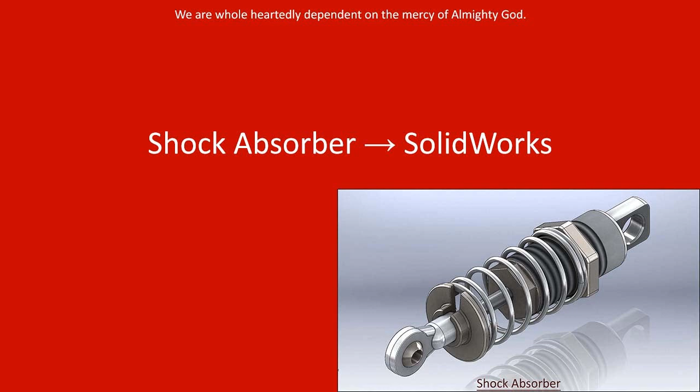Today we will create an assembly file of a shock absorber in SolidWorks, taken from our suspension assembly. You will learn the full modeling process of this model and its components. We used 13 part files and 4 subassemblies to make this assembly. Some pictures are shown at the beginning of this video. Let's start the tutorial.

Now we will create a new inch part file in SolidWorks. Click OK. Now we will activate the extruded boss base command and select the front plane to start the new sketch.

We will draw a circle from the part origin with a diameter of 0.525 inches. Finish the sketch. Now set the extrude depth value to 0.075 inches and click OK. My first boss base extrude feature has been created in the design window.

Now we will change the color of the model like this. My model is looking perfect. Save the part file with the name shock spring adjustment nut.

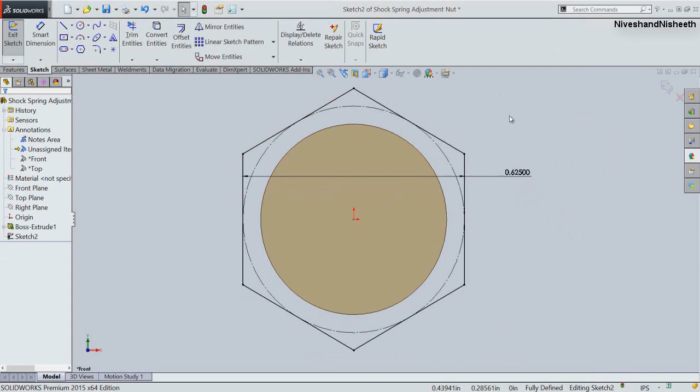Select this vertical line and choose to make it vertical. Now activate the Smart Dimension tool and fix the dimension of 0.625 inches between these two vertical lines. Finish the sketch.

Now activate the extruded boss base command and select the polygon. Enter the depth value 0.125 inches and click OK.

Now rotate the model to the back side and activate the Extruded Cut command. Draw a circle over this face with a diameter of 0.5 inches. Finish the sketch and cut the circle through all over the body. Now see the result.

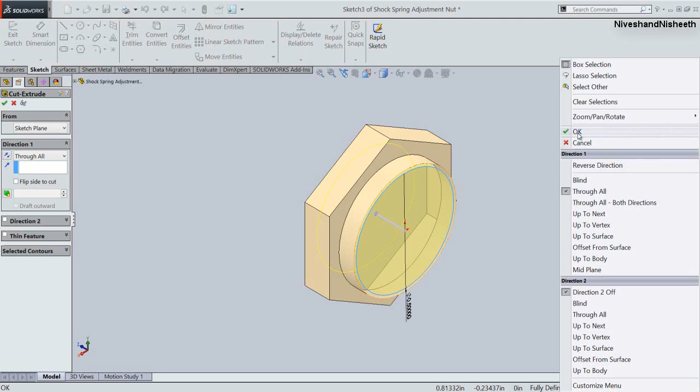We will activate the fillet command, enter the radius 0.005 inches, and apply the fillets over all the polygonal edges of the part.

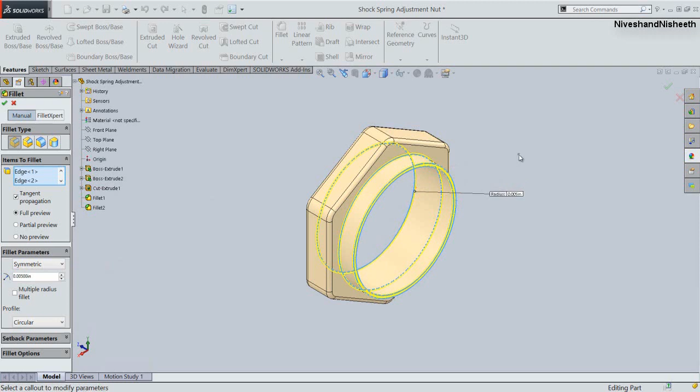Now we will give some more fillets over the part like this. Now my part is completed.

Next, we create a model spring. Now we will create a new part file. Click OK.

Now we will go to the Edit Document Units tab, activate the IPS option, and set the decimal value up to 4 places. Click OK.

Now we will change the scene of my background. Select the backdrop studio room option. It looks great.

Now we will select the front plane to start the new sketch. Create a vertical line here and fix the coincident relation between the midpoint of this line and the part origin. Its length will be 5 inches.

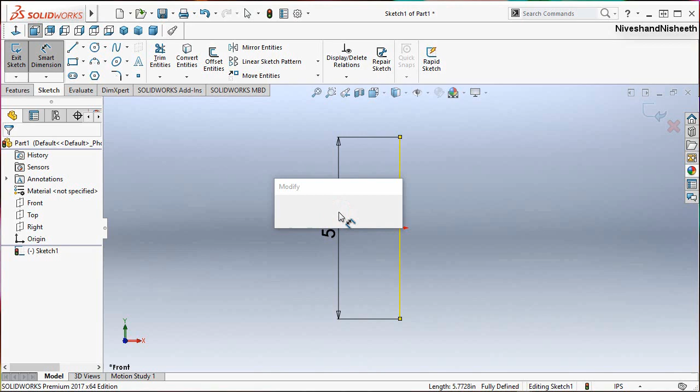Now we will create 2 circles with a diameter of 0.043 inches. Apply the equal relation on these 2 circles, select the center points of the circles, and make vertical.

Create a point on this circle, and one more point here. Apply the tangent relation on these 2 circles. Now select this point and the end point of the line, and fix the horizontal relation between them.

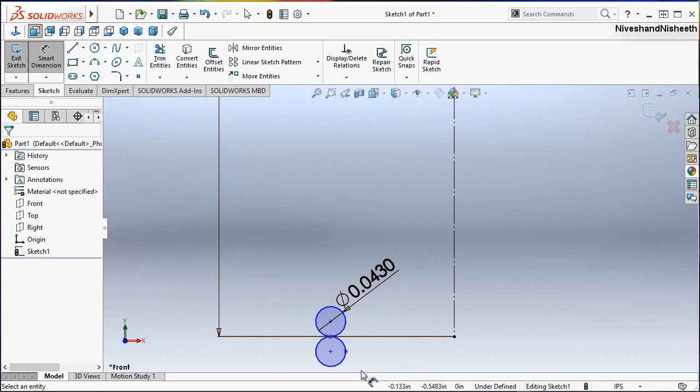Convert the center line into construction geometry. Now select this point and the center construction line and fix the diameter dimension, which will be 0.55 inches.

Now we will choose the zoom to fit option. My sketch is fully defined in the design window, so we will exit the sketching environment. Now choose an isometric view.

We will activate the plane command. First select the center point of the top circle, then select the top plane and click OK. Now see, a plane has been created over the center point of the circle, made parallel from the top plane.

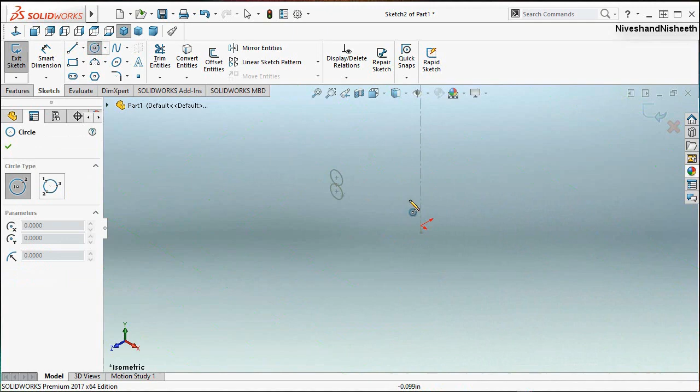We will create a new sketch on this plane for making the helix cross section. Create a circle from the part origin and snap it on the center point of the top circle. Finish the sketch, and hide the visibility of this work plane.

We will go back to the base sketch and convert the lower circle into construction geometry, because the Helix Spiral tool will not select the sketch properly. Finish the sketch.

Now we will activate the Helix Spiral tool. First we will select this circle for the helix cross section. Now see the helical curve preview is visible here in the design window.

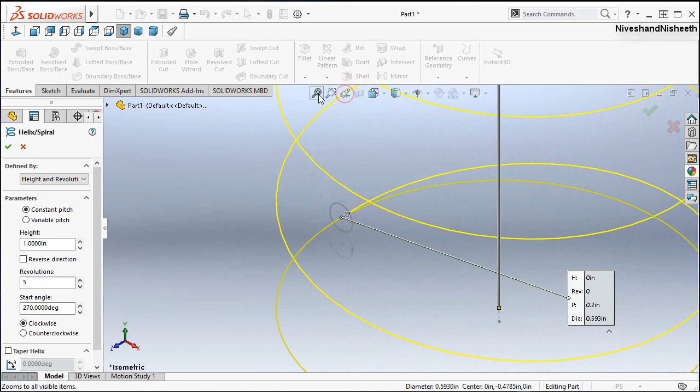Set the height and revolution option under the define by area. Fix the height value to 1 inch and set the revolution value to 5. Then fix the start angle value to 270 degrees. Now see the helix direction is visible here. Click OK.

Save the part file with the name suspension spring.

Click save, okay, that's it. Now we will activate the swept boss base command.

First of all, we will select the small circle from here, which will keep as a profile. Then select the helix curve from here, which will keep as a path. Now you can see in the design window, my swept boss base feature preview is visible here.

Click OK to finish the command. Now see the result. My suspension spring has been created successfully on here. Alright, it looks great.

Now we will activate the document properties button on here. Go to the image quality section and here we will increase the shaded and draft quality of the spring model so that the edges of my model look very good. Click OK.

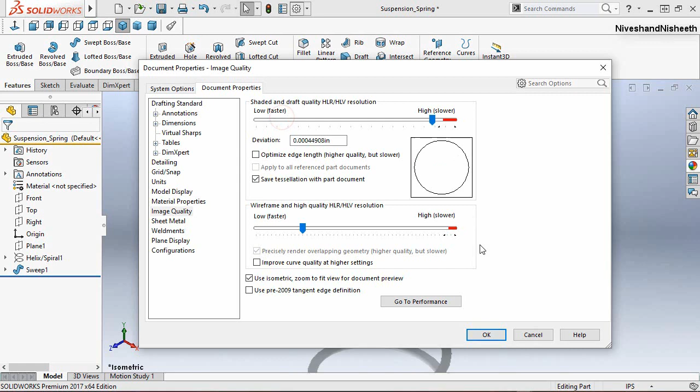Now see the result. Now we will change the material of the model as chromium plate. Okay, my model is looking perfect.

Let's start the sketch over this plane. Open the visibility of sketch 1. In the same manner, we will create one more helix cross section on here that we had done previously.

Alright, activate the Helix Spiral tool from here and select the circle. Now activate the reverse direction button on here.

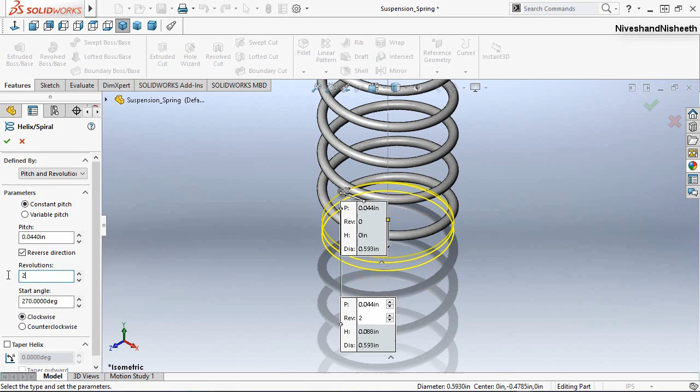Select the pitch and revolution option. Fix the pitch value 0.043 plus 0.001 inch and set the revolution value. Choose the counterclockwise option and click OK.

Now see. In the same manner, we will create another sweep boss base feature like this. Okay, it is looking very fine.

Start the sketch over the front plane. Take the project of the entire model by activating the intersection curve command. Enable the section view on here.

Now we will rotate the model in this position. Convert all the sketches into construction geometry.

Now we draw a rectangle on here. And fix the tangent relation between this rectangle line and this curve. Alright, finish the sketch.

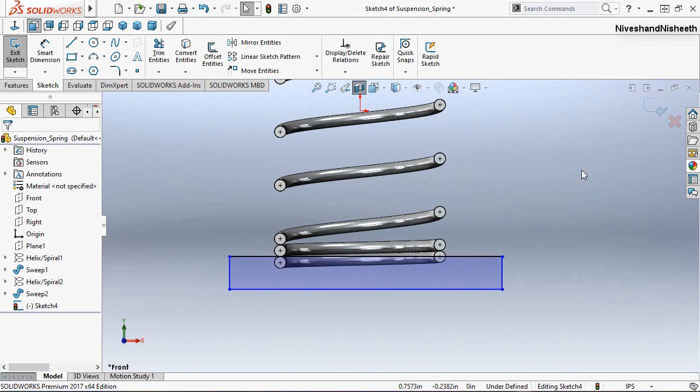Choose an isometric view. Select the line of the rectangle and start the Extruded Cut command. Now we will choose the through all both option and click OK.

Now see, my bottom surface of the spring model is plain on here, so that we will place the spring easily on my suspension assembly. Okay, that's it.

Open the visibility of sketch 4. Create a new plane over the top end of the spring like this, which will be made parallel to the top plane.

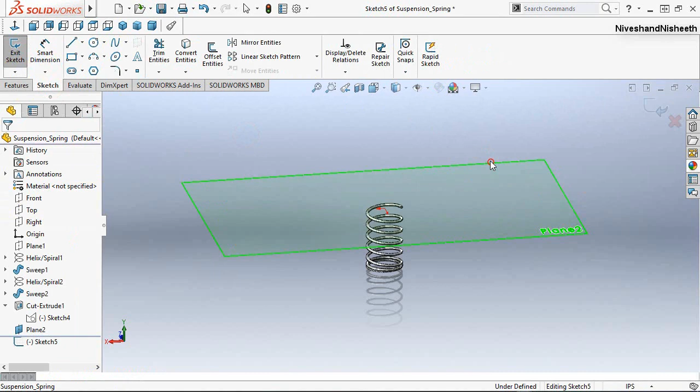Start the sketch over this plane. Now we will create another circle over this plane for creating a helix cross section. Alright, finish the sketch.

Activate the helix tool and select this circle. Same values will keep on here. Deactivate the reverse direction option and choose the clockwise option and click OK.

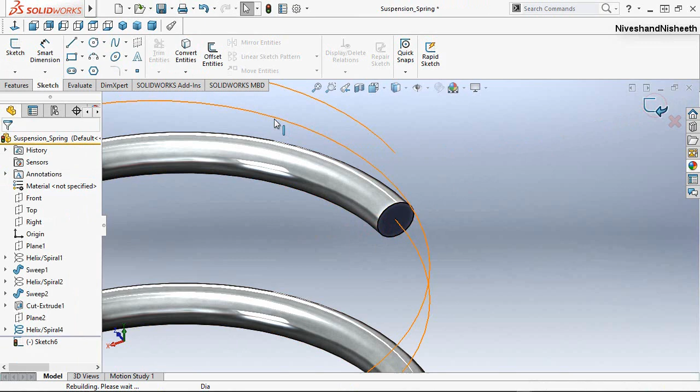Create a new sketch over the top face of the spring and take the project on this edge. Okay, that's it. Finish the sketch. Now we will create another swept boss base feature like this.

Now we will open the visibility of sketch 4. Activate the plane command. Now select this point, and select this point, and select the third point. Okay, alright, now see the result.

My 3-point work plane has been created on here. Let's start the sketch over this plane. In the same manner, we will plane the top face of the spring by using the Extruded Cut command that we had done over the bottom face.

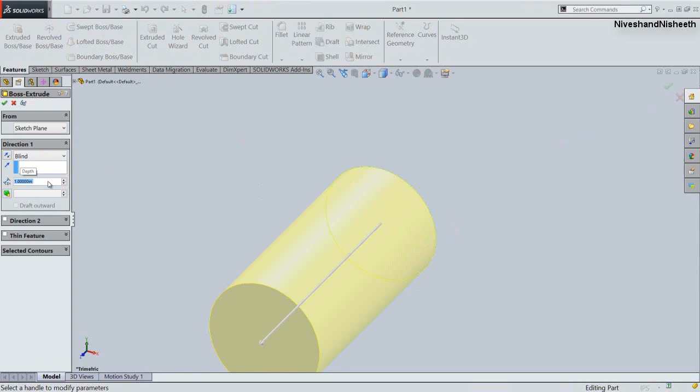Now we will save the part with the name shock body 1.3 length.

Now we will activate the shell tool from here and select the front face. Set the thickness value 0.035 inches and click OK.

Now we will apply the fillet on this edge. The fillet radius will keep 0.05 inches.

Let's activate the Extruded boss base command and start the sketch over the front face. Now create a circle on this face and fix the diameter 0.375 inches. Finish the sketch. Enter the depth value 0.4 inches and click OK.

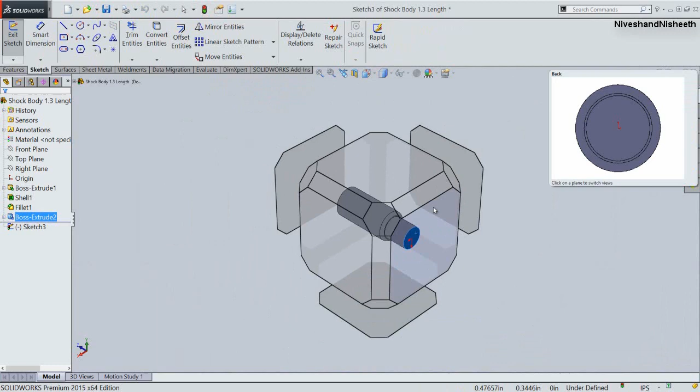Now we will create another new sketch on the front face. Draw a vertical construction line on the center part origin and take the project of this inner edge by activating the Convert Entities command.

Now we draw two vertical lines on both sides of the center line. And select these three lines on here. Choose Make Symmetric. Okay.

Apply the dimension 0.15 inches between these two vertical lines. Fix the coincident relation between this endpoint of the line and the inner circle. In the same manner, we will fix another coincident relation over the opposite line.

Now convert this circle into construction geometry, otherwise the extrude cut feature does not pick up the sketch at a time. Now create a center point arc on both sides like this.

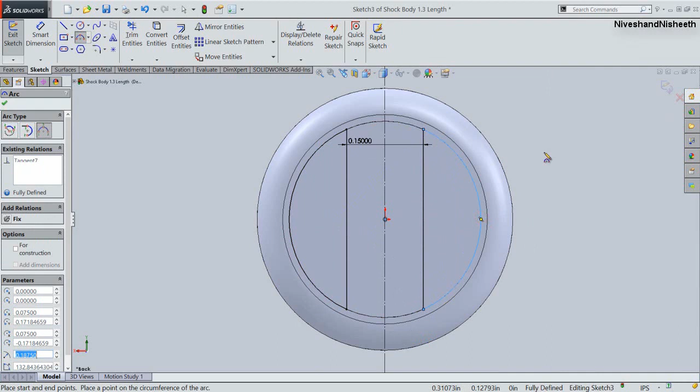Now exit. I will choose the cut extrude, okay, select the sketch. Now I will create one more cut extrude feature on the opposite side.

I will select the extrude cut command and select the side face. Now draw a circle, its diameter 0.24 inches, and distance from the outer edge 0.1875 inches.

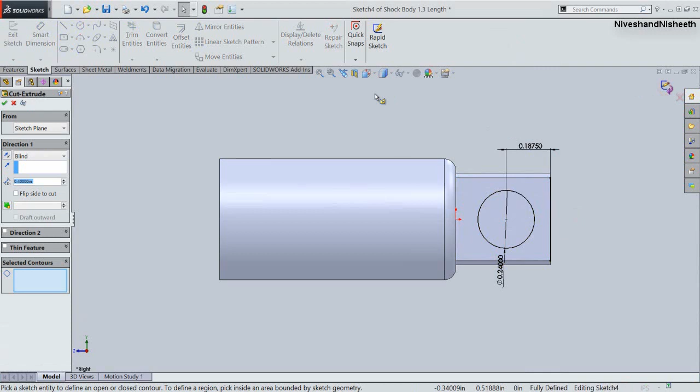Now select these 2 points and choose make horizontal relation. See, my sketch is fully defined, so we will exit the sketch. Now select the circle and condition keep through all both.

Now I will apply some chamfer and fillet over the hole.

Now I will start the cosmetic thread tool from here. First I will choose this circular edge.

Now I will select the 1/2-20 size here. Thread depth keep 0.75 inches. Now I will select the front face of this model so that my cosmetic thread has started from here. Okay, now see.

Now we will apply another cosmetic thread over the hole like this. This time thread depth keep 0.375 inches.

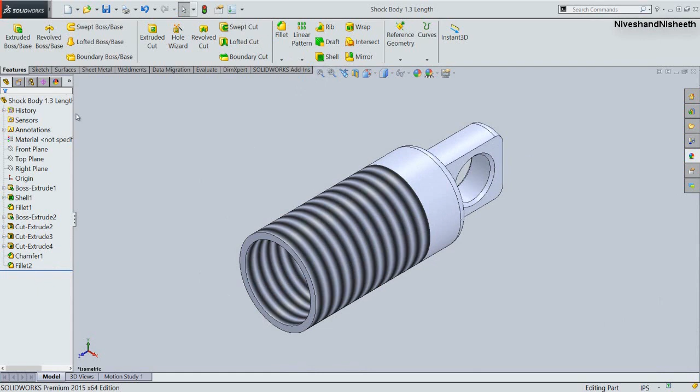Now I will change the color of the model blue. It is looking perfect. Now save the file and close it.

Now we will create another new inch part file from here.

First of all, we will activate the extruded boss base command. Choose front plane to start the new sketch. Now we draw a circle from this origin point. Its diameter will keep 0.5 inches.

Okay, finish the sketch. Enter the depth value 0.125 inches. Click OK. Now see, now choose isometric view.

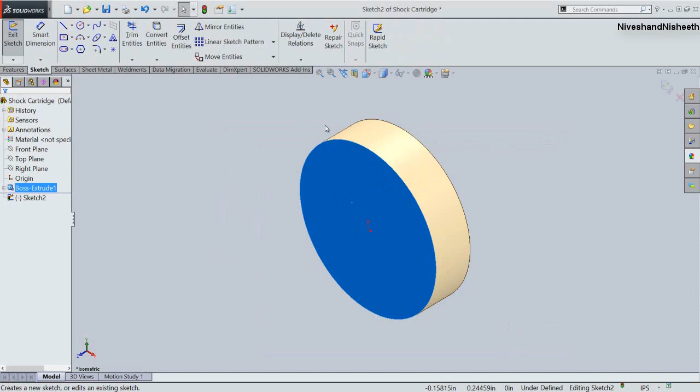Select this face, sketch. Now choose front view from here.

And create a polygon from the center point, and snap the polygon point over the outer edge of this feature. Now choose make coincident over this point. Finish the sketch.

Activate the Extruded Cut command and select the polygon from here. Now select the flip side to cut option and enter the depth value 0.11 inches.

Now I will activate the fillet command, constant size fillet, symmetric, and 0.005 inches the radius.

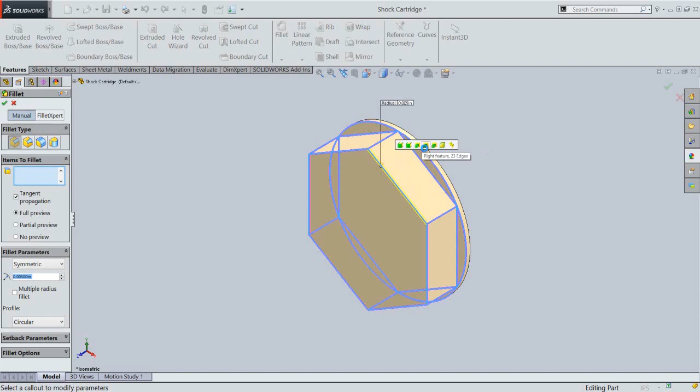Now one by one I will choose all, but I will choose the right feature option here, so it will automatically select all the edges of the part. There is no need to select one by one. Okay, alright.

Now my part is looking perfect. Now rotate the model in rear side.

And activate the Extruded Boss Base command. Select this face to start the new sketch. Now we will create a circle from here and its diameter will keep 0.43 inches.

Finish the sketch. Enter the depth value 0.25 inches. Okay, alright.

Now we will start the new sketch over this face. Create a circle from here. Its diameter will keep 0.25 inches.

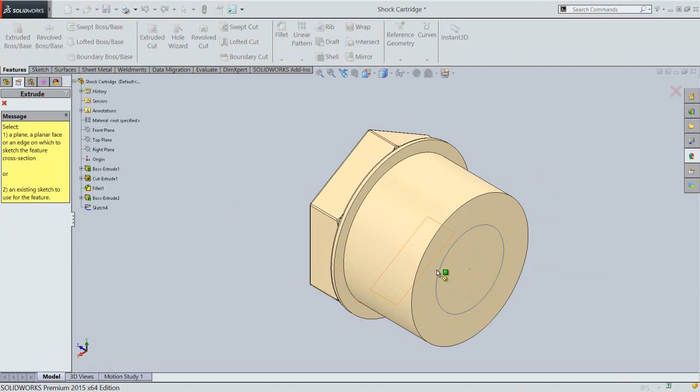Finish the sketch. Now activate the Extruded Cut command and select the circle. Enter the depth value 0.29 inches. Okay, alright. Now my hole is created over this face.

Now we will activate the Extruded Cut command. Select this front face. Draw a circle on here. Its diameter will keep 0.135 inches. Okay, that's it.

End condition keep through all. Okay.

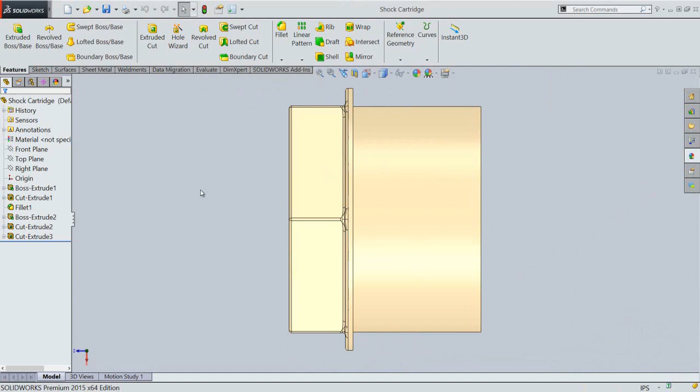Now I will choose the top view. Select top plane, sketch, activate the section view by selecting this plane. Okay, that's it.

Now we will take the project of the entire model by activating the intersection curve command and convert all the sketches into construction geometry.

Now we will draw a vertical construction line over the part origin. Now we will draw some more lines over this edge.

Select this line and this line, fix the dimension 0.025 inches. .05 inches. .025 inches. Okay, that's it.

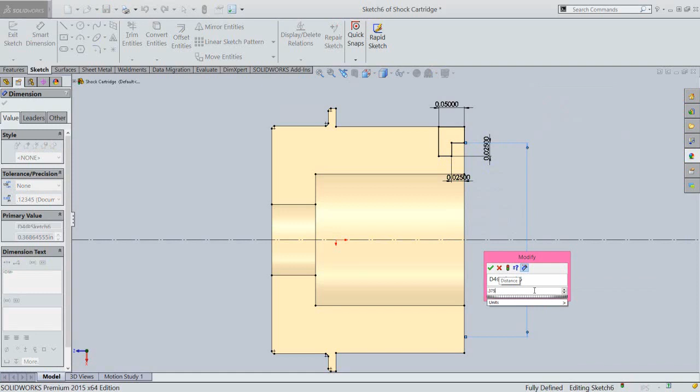Select this line and center construction line, its dimension 0.375 inches. Okay, that's it.

Finish the sketch. Now go to the isometric view and deactivate the section view.

Now we will activate the Revolve cut command from here. Choose the center line. Okay, that's it. Now my feature is cut on here.

Now we will apply the fillets on these two circular edges. Okay, it looks great.

Activate the cosmetic thread command and select the ANSI option under the standard section. Now select the back circular edge to apply the thread.

Alright, my part has been completed on here, so we will close the part file. Now create another new part file on here. Let's start the sketch over the front plane.

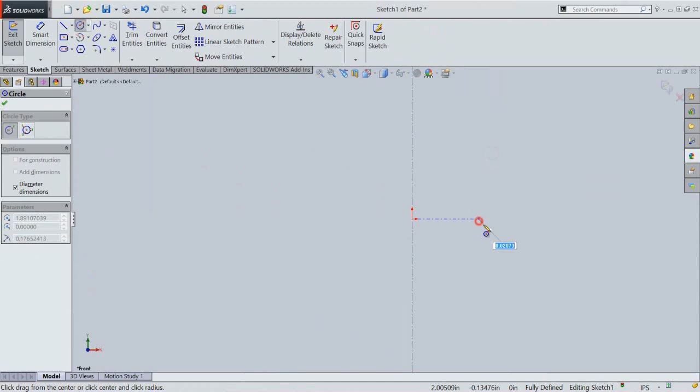Now we will draw a vertical construction line on the center part origin. Draw a circle on here. Its diameter will keep 0.0625 inches. The center distance of the circle will keep 0.094 inches.

Fix the horizontal relation between the center part origin and circle center point. Okay, finish the sketch.

Now we will activate the Revolve boss base command and select the vertical construction line for the axis of revolution. Click OK. Now see.

Now we will change the material of the part as polished bronze. Go to the lights folder and increase the ambient light from here. Now my model is looking very nice.

Save the file with the name O-ring. Okay, that's it. Close the part file.

Now we will create a new inch part file and choose the front plane to sketch. Now we draw a vertical and horizontal construction line over the part origin.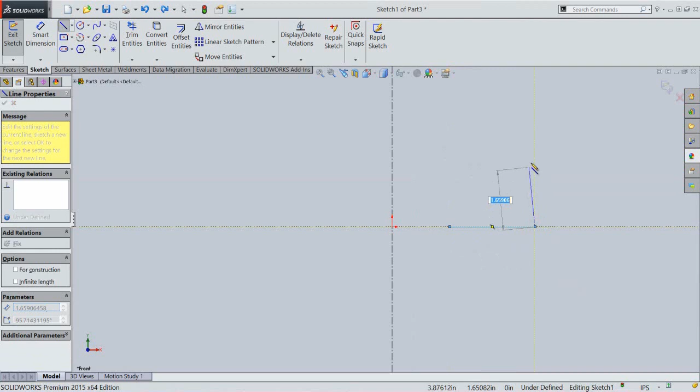Now we will create two lines here. Select this endpoint of the line and the center construction line. Fix the diameter dimension at 0.13 inches.

Now we will create another diameter dimension here. It will keep 0.41 inches. Fix this vertical line dimension at 0.07 inches. Okay, alright.

Now we will create another line from this point. This dimension will keep 0.025 inches.

Now we will draw some more lines, something like this. Select this line and the center line and fix the diameter dimension at 0.375 inches.

Now select this endpoint of the line and center line and fix the dimension at 0.356 inches. Okay, that's it. Now we will apply some more dimensions here like this to fully constrain the sketch.

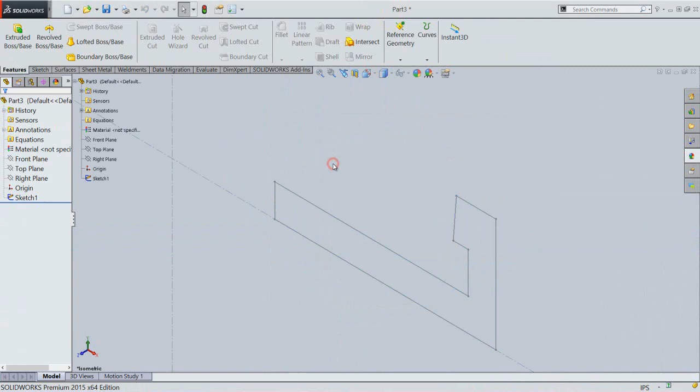Okay, now see, finish the sketch. Choose isometric view. Now we will activate the Revolve boss base command from here. Select this vertical construction line. Now see, click OK.

Now we will change the material of the model as polished steel. Okay, that's it, my part is looking perfect. Save the file with the name shock cartridge cover.

Okay, alright. Now we will apply the fillet over this circular edge. Now we will apply another fillet on these edges of the part, like this.

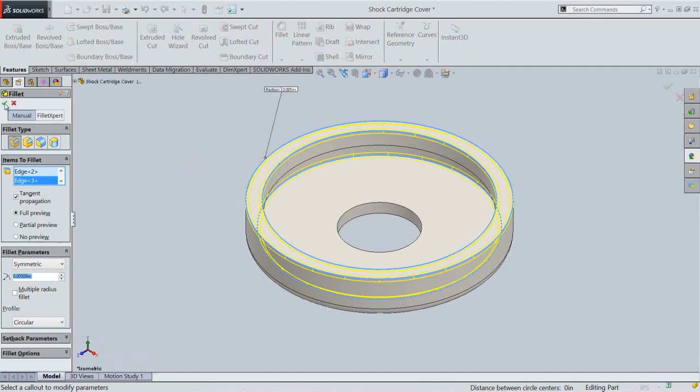Okay, close the part file. Now we will create another new inch part file. Now we will activate the extrude boss base command from here. Select the front plane to start the new sketch.

Draw a circle from the center point. Its diameter will keep 0.25 inches. Now draw another circle here. Its diameter will keep 0.135 inches. Okay, finish the sketch.

Enter the depth value 0.165 inches and click OK.

Now we will change the color of the model. I have already maintained a custom color here. Okay, it looks great.

Activate the fillet tool here and apply the fillets over the part edges like this.

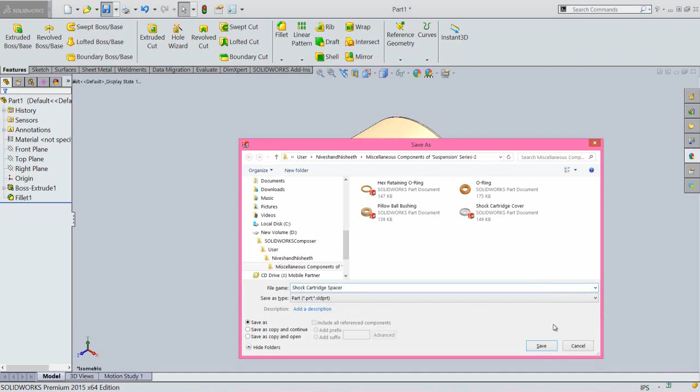Save the part with the name shock cartridge spacer. Okay, click save, and close the part file. Now we will create another new inch part file here.

Okay. First of all, we will activate the Revolve boss base command here. Choose the front plane to start the new sketch. Now we will create a vertical construction line over the part origin and draw a center point arc from the center point.

Okay. Now draw a circle over the center point. Fix the radius of this arc; it will keep 0.125 inches.

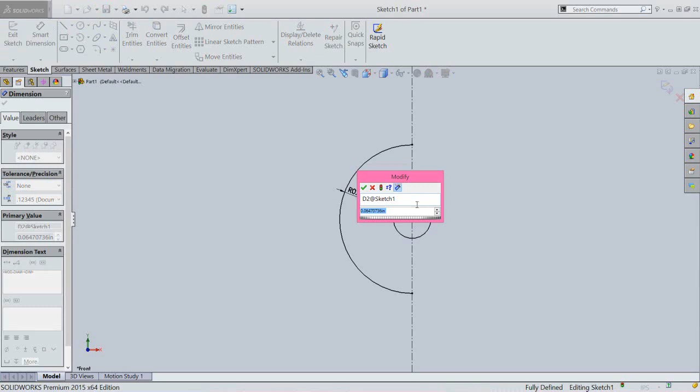Now we will apply the diameter of this circle; it will keep 0.125 inches. Now we will draw a vertical line over the end point of the arc. Okay, finish the sketch.

Now we will select this sketch region and center line and click OK. Okay, now we will open the visibility of sketch 1 here.

And activate the Extruded Cut command. Now we will select this circle. End condition will keep through all both. And click OK.

Now see, my hole is created over this part, and hide the visibility of sketch 1. Okay, now we will change the color of the part.

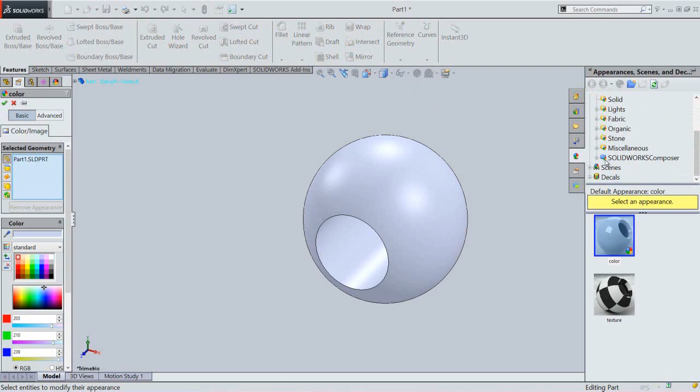And save the file with the name .25 ball end. Okay, that's it. Close the file.

Now we will create a new inch part file. Okay, alright. And activate the extruded boss base command from here. Choose the front plane to start the new sketch. Now we draw two circles from the part origin.

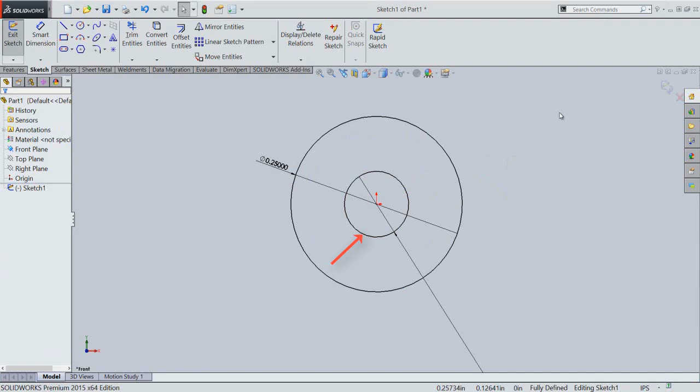The outer circle diameter will keep 0.25 inches and the inner circle diameter will keep 0.09375 inches. Okay, finish the sketch.

Now we will choose the midplane option, okay, and enter the depth value 0.015 inches. Click OK and save the part with the name eClip.

Now we will start the new sketch over the front face of this part. Now we will take the project of the entire face, okay. We will draw a sketch something like this.

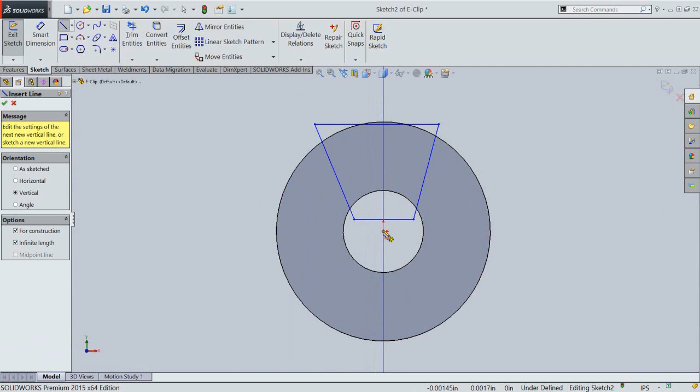Create a vertical construction line over the part origin. Select these three lines and fix the symmetric relation on these lines. The bottom line dimension will keep 0.05 inches, and the top line dimension will keep 0.1 inches. Now we will apply the tangent relation between this line and the outer circular edge, and fix the angular dimension 25 degrees between these two lines. Finish the sketch.

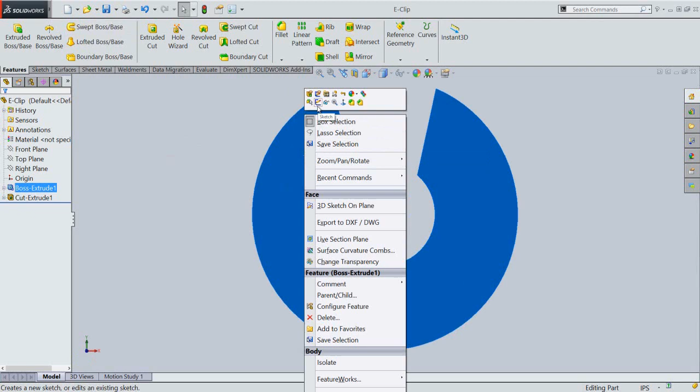Activate the Extrude Cut command and cut this sketch profile through all the base feature. Let's start the new sketch over the front face, and take the project of this face.

Activate the offset entities command and fix the offset distance value 0.03 inches. Deactivate the select chain option, and take the offset of the outer curve inside. Now drag the curve from this point, now drag the curve from the end point. Create an aligned line between this point and center circle.

Now create a vertical construction line over the part origin. We will create a mirror of this aligned line on the opposite side. Now trim the extra arc on here. Apply the angular dimension 50 degrees between this aligned line and hole edge. Apply one more dimension 0.083 inches between these two endpoints.

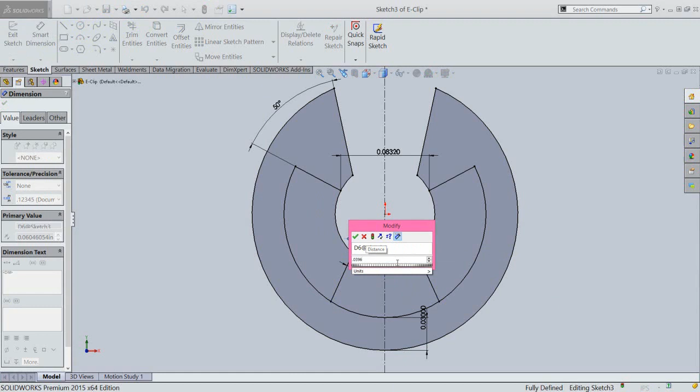In the same manner, we will apply another aligned line like this over the opposite side and mirror it. Apply angular dimension 50 degrees between these two lines, and fix another dimension 0.0396 inches between these two lines. Alright, finish the sketch.

Now we will activate the Extrude Cut command and select these two sketch profiles like this, and the condition will keep through all. Click OK. Now see, it looks great.

Now we will apply the fillets over the corner edges of the E-clip like this.

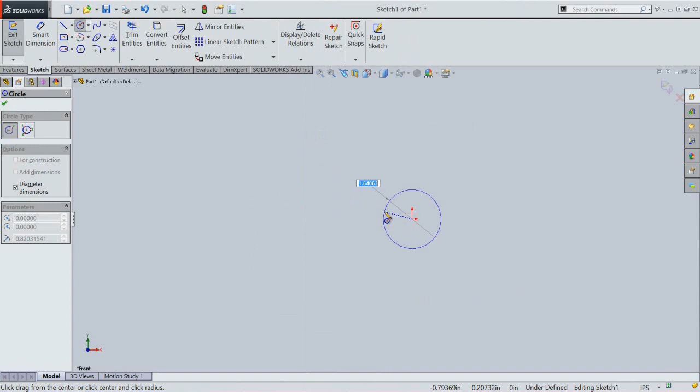Let's start the new part file. I'll choose the Extrude Boss Base command and select the front plane to sketch. Create a circle from the center point, the diameter will keep 0.125 inches. Finish the sketch, depth value 1.25 inches. Choose the mid-plane option. Save the file with the name Shock Shaft.

Start the sketch on the front face, create a circle on here. Diameter will keep 0.112 inches. Finish the sketch. Fix the depth value 0.225 inches. Okay, that's it.

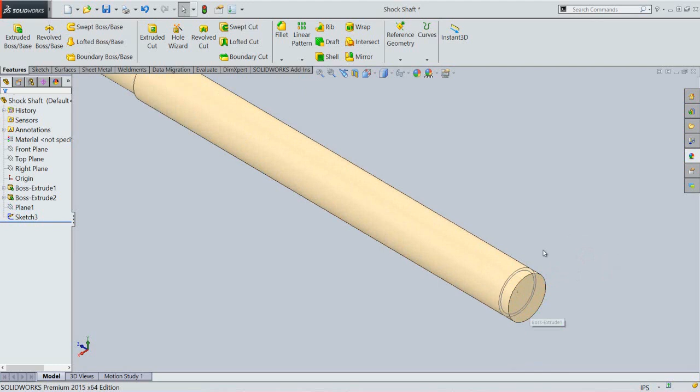Now we will create a plane at an offset distance value 0.032 inches inside from the back face, and start the sketch on this plane. Take the project of the two circular edges like this. Finish the sketch. Activate the Cut Extrude command and select the sketch region. Fix the cut depth value 0.015 inches. Click OK. Now see, my slot is cut on this circular face.

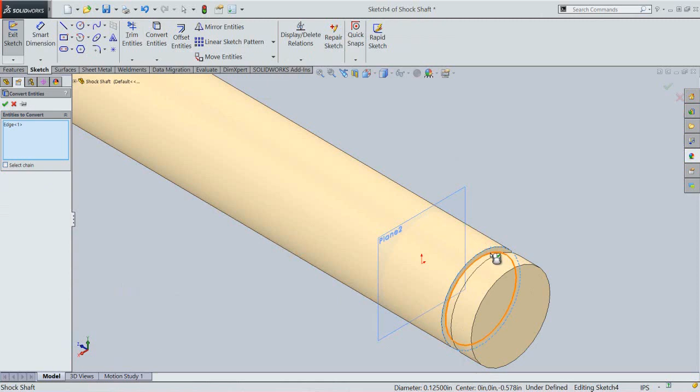In the same manner, we will create another slot in the following way. Now we will apply the chamfer like this.

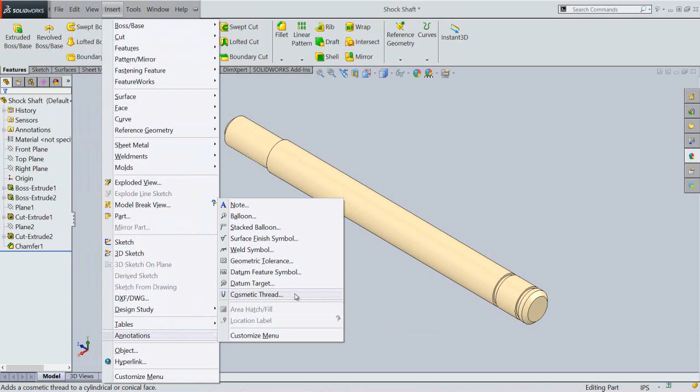Activate the cosmetic thread command and apply the thread on the front side circular face. Size will keep 4-40 and click OK. Now my shock shaft has been completed on here, so we will close the part file.

Let's start the new part file on here. Click OK. I will choose the Extrude Boss Base command and select the front plane to sketch. Create a circle from the center point. Diameter will keep 0.4 inches. Finish the sketch.

Now choose midplane option. Depth value will keep 0.115 inches. Save the file with the name ball end.

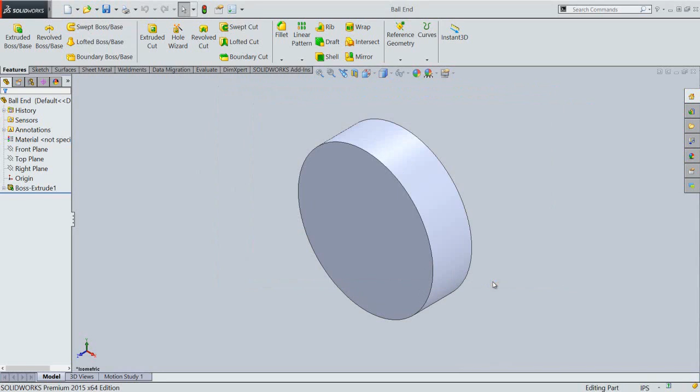Let's start the new sketch over the front plane. Now we will activate the section view by selecting this plane. Now draw a horizontal construction line on the center part origin. Now we will draw the three lines like this by connecting the outer edge of the base feature and draw an arc on here to close the sketch.

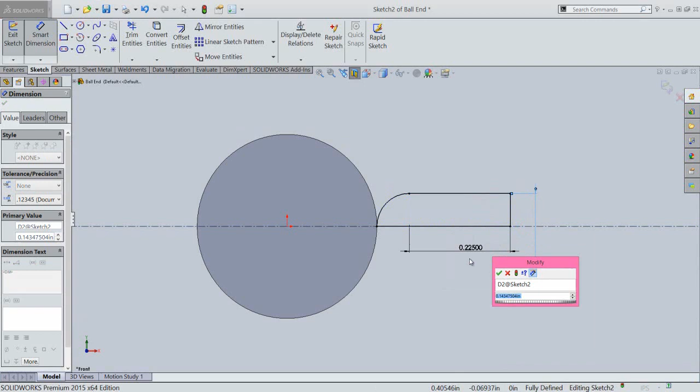Now select the center point of the arc and this line. Choose make coincident. Fix the 0.225 inches dimension between this point and the end point of the line. Now we will apply the diameter dimension between this line and center construction line. It will also keep 0.225 inches. Finish the sketch.

Now we will revolve this sketch profile on here, and start the sketch over the front plane. Now take the project of the outer surface of these two features.

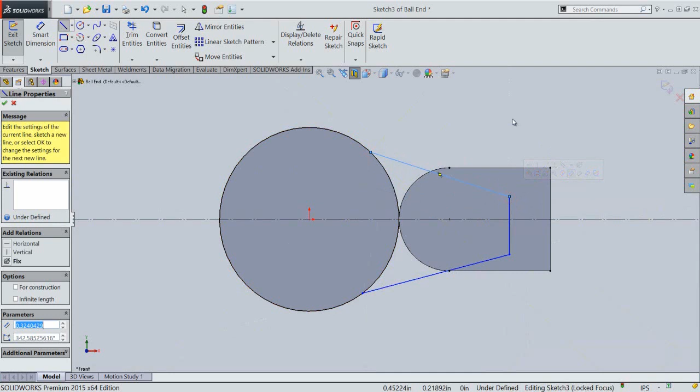Draw a horizontal construction line on the center part origin. Now I will create a vertical line, and create another line I will connect from here to here. Now I will create another one, that's it. I will select this line and this line, and now I will choose make symmetric relation.

That's it. Now this line dimension will keep 0.1375 inches, and now this dimension will keep 0.3961 inches. Now I need to apply one more dimension between these 2 points to fully define the sketch. It will keep 0.3154 inches.

Choose exit. I will select the extruded boss base command. Now I will select this one and the end condition will keep midplane.

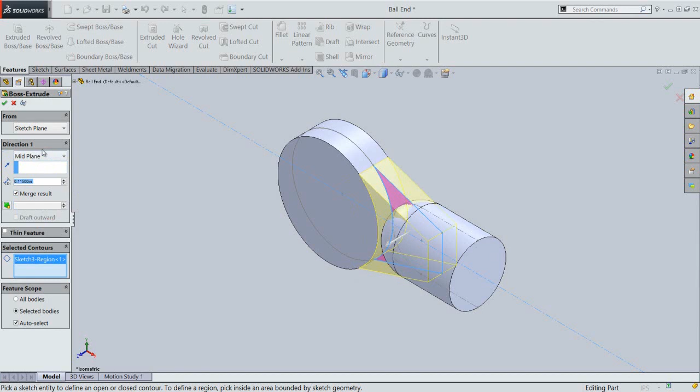Now I will apply the fillets over all 4 corner edges. Okay, now my part is looking perfect.

Now I will activate the split line tool from the curves tab. In the splitting bodies selection section, we will select the front plane. Next, in the faces section, we will select this outer curve face. Now see the result. My face is split on here.

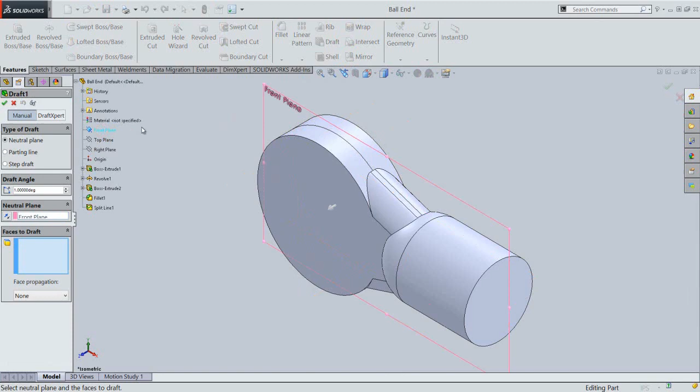Now we will activate the draft tool. In the neutral plane section, at first we will select the front plane. Now rotate the model in the top view.

In the faces to draft section, we will select the left face of the part. Fix the draft angle value 1 degree and click OK. Now see the result. My left portion of the part has been bent by using this tool.

Okay, that's it. In the same manner, we will bend the right portion of the part by using this tool.

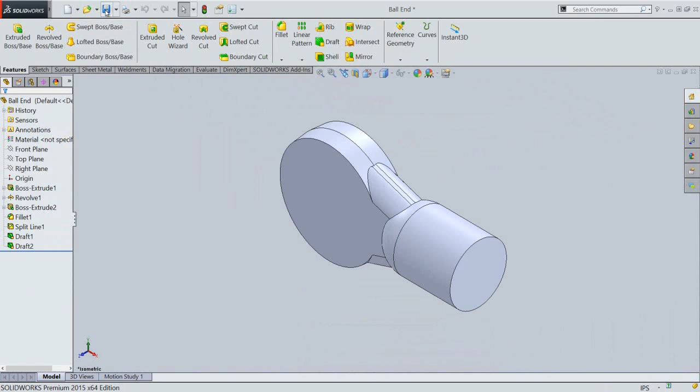Now we will activate the hole wizard command from here. In the hole type section, we will choose the straight option. Standard will keep ANSI inch of the hole. Now we will select the #4-40 size under the hole specification area. Hole depth will keep 0.225 inches.

Now go to the positions tab and select this face for creating the hole. Now hover the cursor over the center point to locate the center point of the hole and click OK. Now see the result. My tapped hole is created over this face.

Apply the fillets on this circular edge. The fillet radius will keep 0.015 inches. Okay, that's it. It looks great. Save the part file.

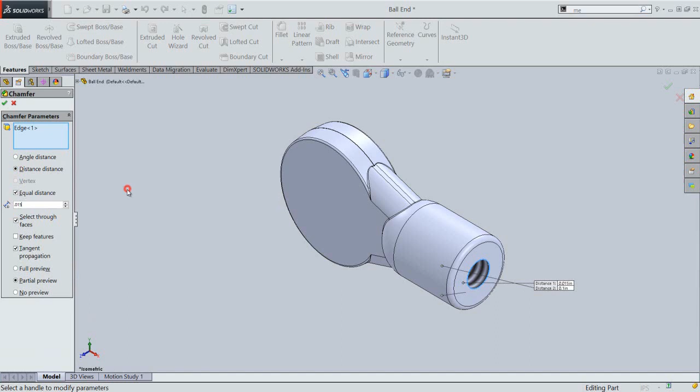Now we will apply the chamfer over the hole edge. The chamfer distance value is 0.015 inches.

Now choose front plane, sketch, and activate the section view by selecting this plane. Choose front view. Now I will choose the line tool and create a line on here like this.

Now select this line and the center part origin and choose make midpoint. Now we will create a 3-point arc between the end points of the line like this, and its radius will keep 0.125 inches, and apply the coincident constraint between these 2 points. Finish the sketch.

Now rotate the model in isometric view. Activate the Revolve cut command. Select the sketch and click OK. Deactivate the section view. Now see, my another hole is created over this part.

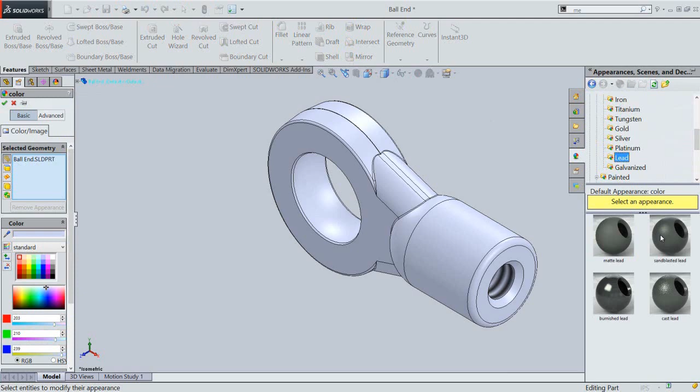Now we will increase the ambient light from here, and we will add the directional light on here. Now we will set the direction of this light. Now see, my part is looking very bright.

Save the part file. Now my part has been completed on here, so we will close the part file. Finally, all the part files of the shock absorber model are finished here.

Okay, that's it. First of all, we will create a new inch assembly file from here in SolidWorks. Now see, the begin assembly command is already being activated here.

Browse the file from here and place the part file ball end.

Change the light of this part from here. Okay, it looks good.

Create another part in this assembly.

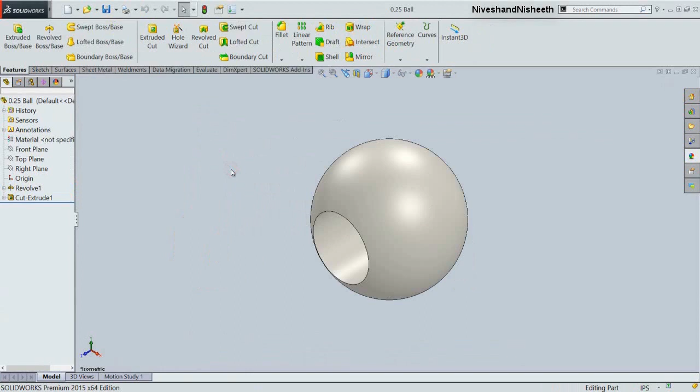Now we will activate the mate command and select the origin point of this part, and next select the origin point of the assembly and apply coincident constraint. Now see the result. Save the assembly with the name ball end.

Create another new assembly and place the part shock shaft.

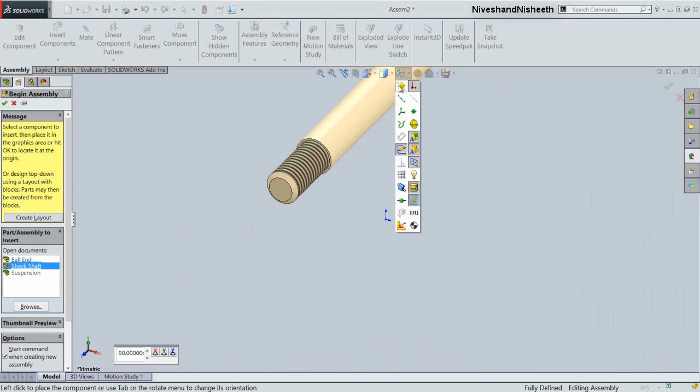Snap the origin points of this part and the assembly origin. Now my model is fully defined, and save the assembly with the name shock shaft.

Now we will change the color of this part, change the material of this part, choose sandblasted steel. Okay, it looks good.

Hide the visibility of the assembly origin. Now we will place the piston part in this assembly.

Now see the result. Place another part, E-clip. To use the push pin option in the insert component dialog box, to insert multiple copies of the same part. This option is very beneficial for multiple copies of the part to place in the assembly environment.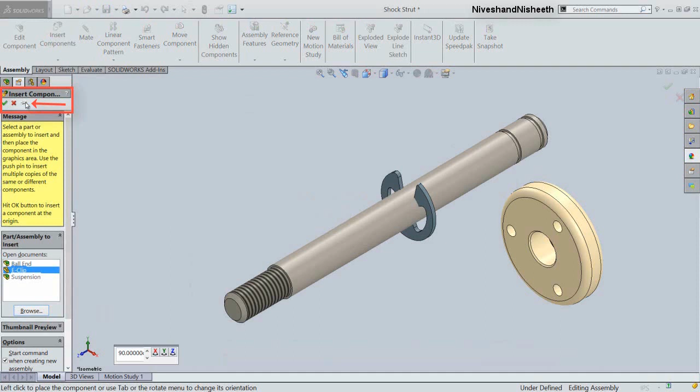Place another E-clip. Select the hole of piston and shock shaft and apply concentric constraint.

Select the face of E-clip and back face of piston and apply coincident constraint. Select this face and select the E-clip face and apply coincident constraint. Select this cylindrical face and select this cylindrical face and apply concentric constraint.

Drag the part from here, select this face of the part and this face of the pin, and apply coincident constraint.

Now we will place the part ball end. Okay, now see the result. Select this face of the assembly and this face of the pin and apply coincident constraint.

Select the outer cylindrical face of the ball end assembly and the cylindrical face of this pin and apply concentric constraint.

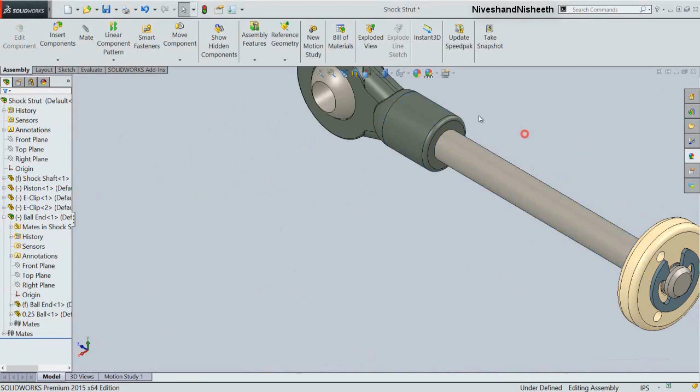Now we will place the part spring cup in this assembly. Now see the result.

Select the face of spring cup and this face of the ball end and apply coincident constraint. Select the hole of spring cup and the cylindrical face of the pin and apply concentric constraint.

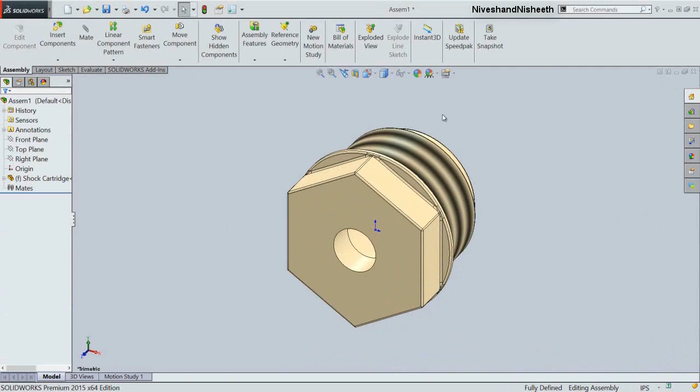This part is fully defined in this assembly. Save the assembly with the name shock cartridge. Okay, that's it.

Now we will activate the insert component command and place the part O-ring in this assembly. Select this axis of the shock cartridge and axis of the O-ring and apply coincident mate.

Now open the visibility of plane 1 and plane 2 of the O-ring. Select plane 2 and the face of shock cartridge and apply coincident mate.

Okay, that's it. Save the assembly.

Now we have placed the part shock cartridge spacer in this assembly. Now we will change the color of this part.

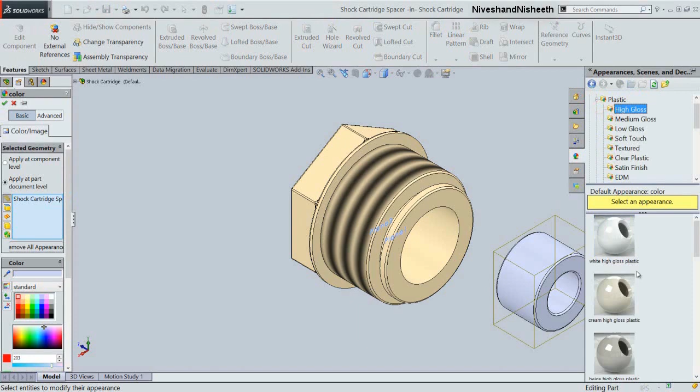Return back to the assembly. Select the cylindrical face of the shock cartridge spacer and the cylindrical face of shock cartridge and apply concentric mate.

Now we will activate the section view by selecting the right plane. Select this face of shock cartridge spacer and select the plane of shock cartridge and apply coincident mate. Now see, that's it.

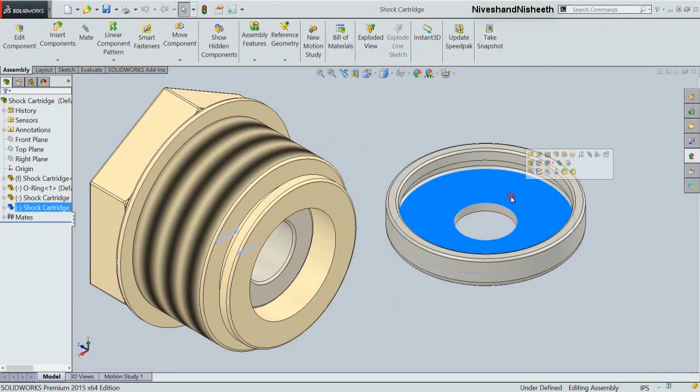Now we will place the part shock cartridge cover in this assembly. Now deactivate the section view. Now rotate the model by using the move with triad command.

Now select the face of the hole. Next, select this face of the hole and apply concentric mate.

Drag the model like this. Now we will place another O-ring in this assembly.

Activate the section view command. Select plane 2 of the O-ring and this face of shock cartridge and apply coincident mate.

Now select the axis of the O-ring and axis of shock cartridge spacer and apply coincident mate. Select this face and the internal face of the spacer and apply coincident mate. Okay, alright.

Deactivate the section view from here and save the assembly.

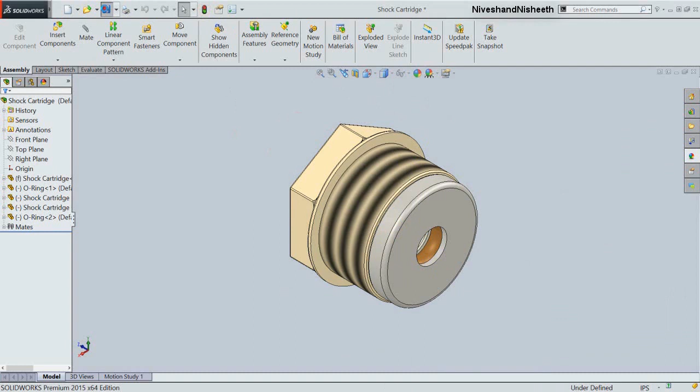Now we will create another assembly and place the part shock body 1.3 length.

Now we will place the shock cartridge part in this assembly. Select the circular face and this circular face and apply concentric mate.

Drag the part, select this face and this face and apply coincident mate. Now see, my assembly is not fully defined.

Select this face and apply angular constraint, angular mate. Set the angle 0 degrees and click OK.

Save the assembly with the name shock body. Okay, that's it.

Now we will create another assembly. Open the visibility of the assembly origin.

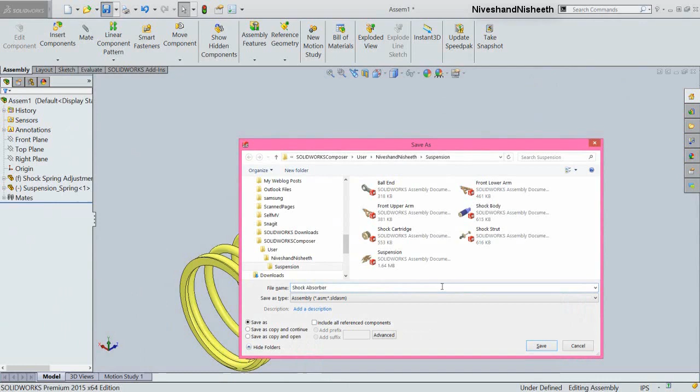Save the assembly with the name shock absorber. Okay, alright.

Now place the shock body assembly in this assembly. Rotate the shock body assembly into this position.

Select this cylindrical face and this cylindrical face and apply concentric mate. Okay, now see.

Select this face and apply the distance mate. Set the distance value 0.4003 inches. Okay, that's it.

Select this face of the shock body and this face of the shock spring adjustment nut and apply angle mate. Okay, the angle mate will keep 0 degree.

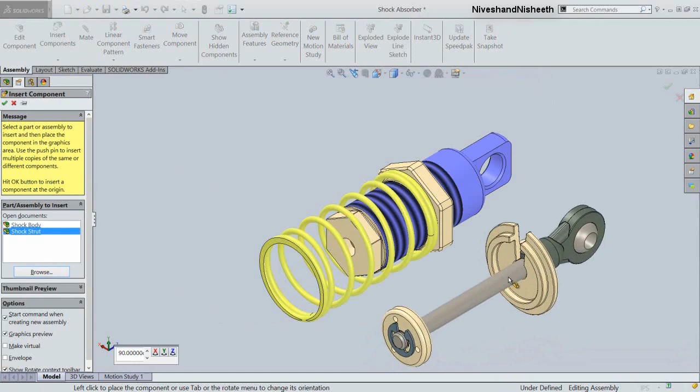Now we have inserted the shock strut assembly in this assembly. Select the shock strut assembly, activate the move with drag command, and rotate this assembly into this position.

Select the cylindrical face of the rod and select this face of the hole and apply concentric mate. Okay, alright.

Drag the ball end assembly, select the face of the spring and select this face, and apply coincident mate.

Select this face and apply the angle constraint. Set the angle value 0 degree, click OK. Now see the result.

Now we will activate the section view by selecting the right plane.

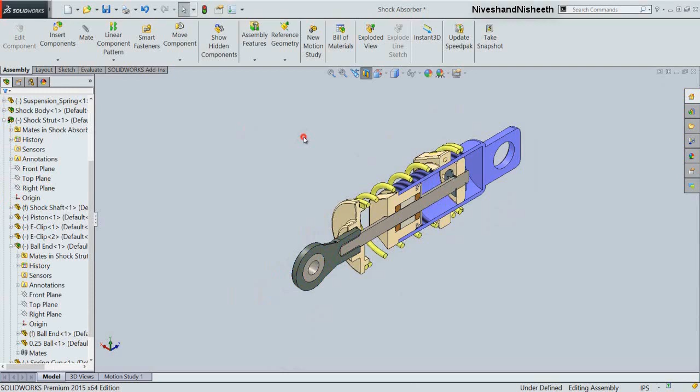Now drag the assembly, select the face of E-clip and select the face of shock cartridge cover and apply coincident mate. Now see the result.

Drag the ball end assembly. Now my shock absorber assembly is completed.

I hope you will enjoy this video.